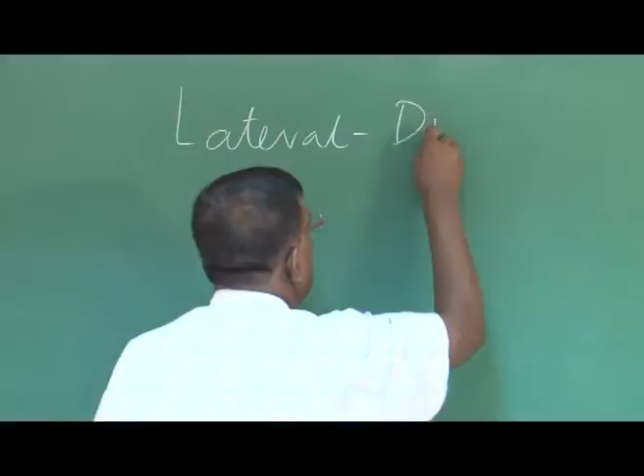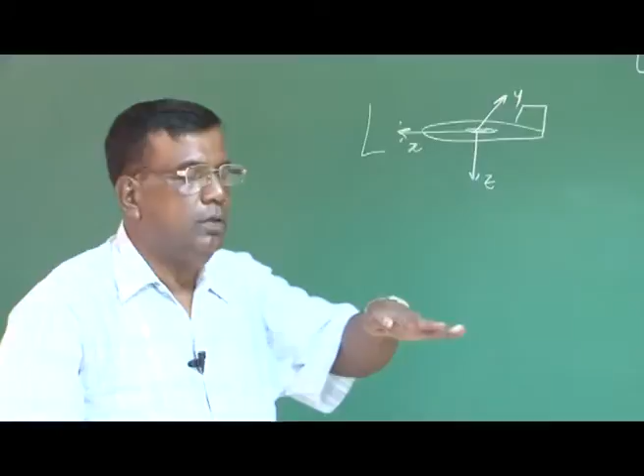Since we have assumed small angle of attack, small perturbation, we have assumed that longitudinal dynamics is decoupled from the lateral directional case. But now when we are talking about the lateral directional case, we understand lateral means - if this is the airplane, this is the x-axis, this is y, this is z. Lateral means we are talking about motion about the x-axis, roll or bank, and directional is motion about the z-axis, yaw, right?

But one thing you should understand is that lateral and directional case cannot be decoupled generally. You can understand, suppose this is the directional case, that is right wing is going back, what will happen? As right wing goes back, the left wing will come forward, so the relative air speed of the left wing will increase, hence the lift will increase, so it will bank also.

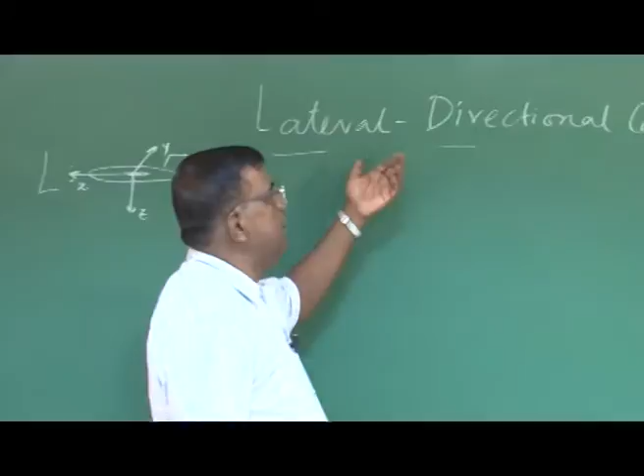So there is a coupling between directional and lateral case. The reverse will also be there - if there is a lateral disturbance, there will be a directional influence on the whole airplane dynamics. That is why we need to go with the lateral directional case together. We are not decoupling lateral and directional case. Although we will see some approximate studies where we assume lateral dynamics and directional dynamics separately, which also yield useful information, especially for designers, right?

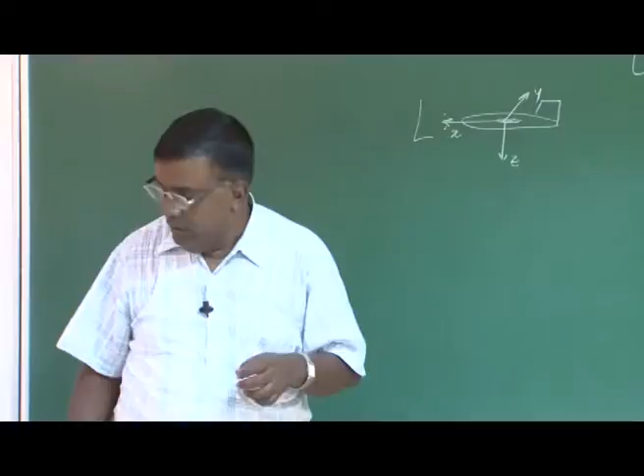Our approach was first to write the equations of motion, which we have already derived, then introduce perturbation, and then follow the similar steps as we have done for the longitudinal case. So we will take one equation and we will try to revisit, and you will see that you are very comfortable - nothing extra we are doing here as far as technique is concerned.

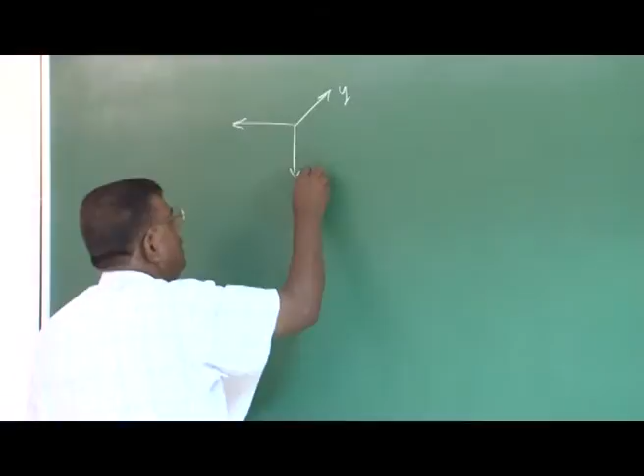If I take the equation along y, force equation along y direction, then rolling moment about x, yawing moment about z - these three, that is this motion along y, roll about x, and yaw about z, right?

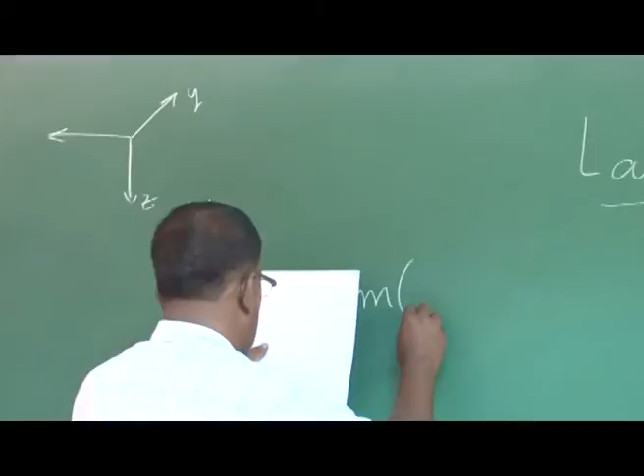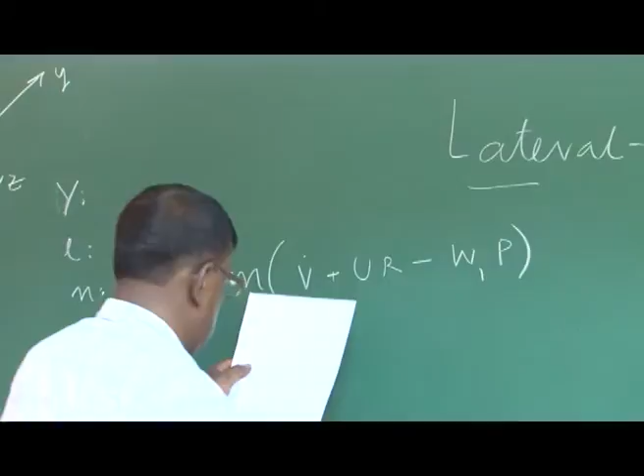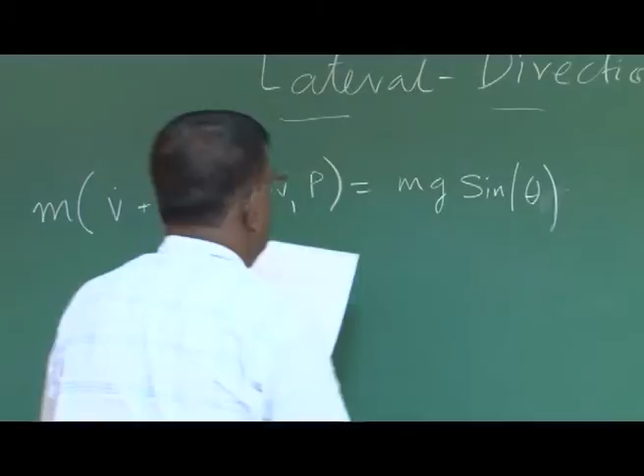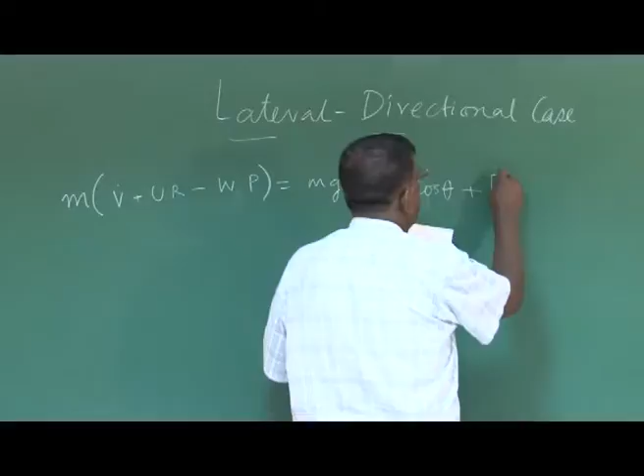So I will take the first y equation. If you recall, the equation was of the form m v dot plus u r minus w p is equal to mg sine phi cos theta plus F A y. This is the equation of motion along the y direction, right?

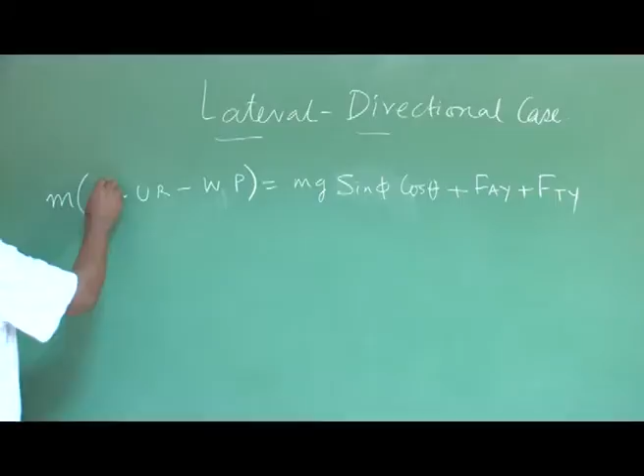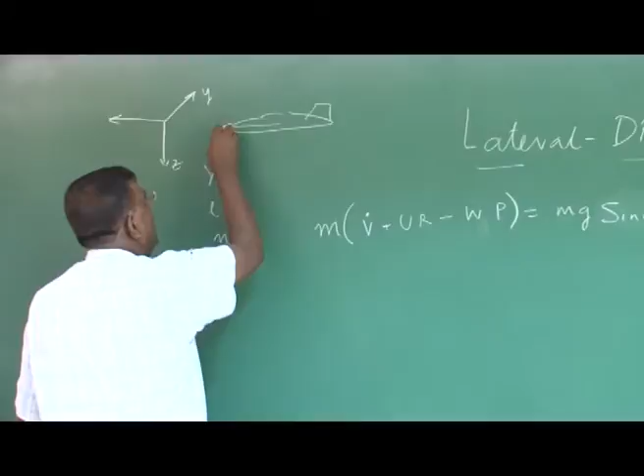What was v? v was the component of total velocity along the local y direction. If this is the airplane, this is x, this is y, this is z, and this is the total velocity vt or v star, whatever you write, then v is the component of this velocity resolved along the y direction of the body fixed axis system.

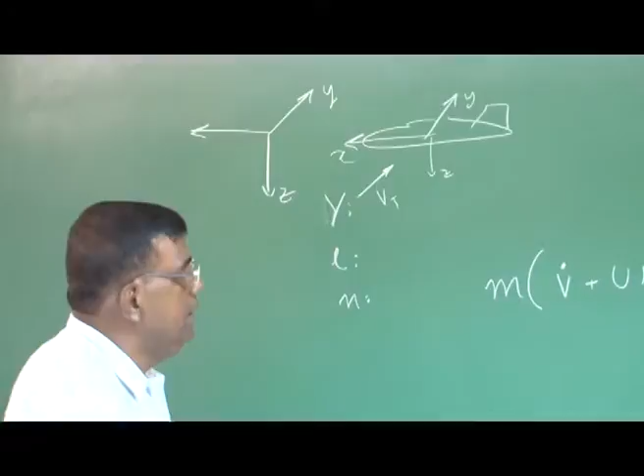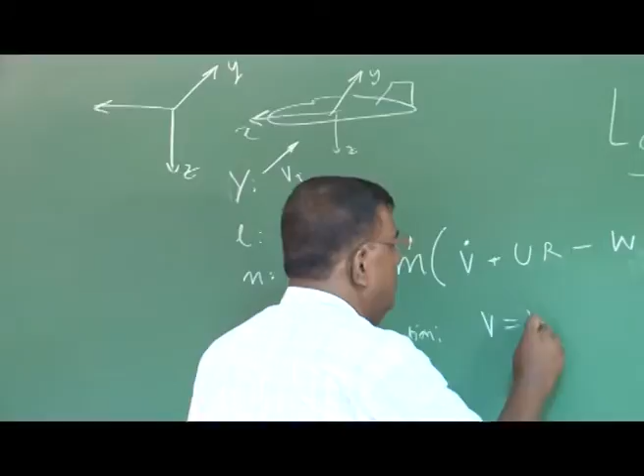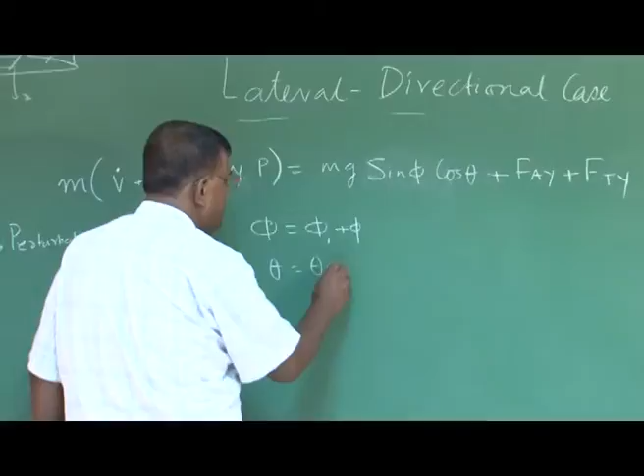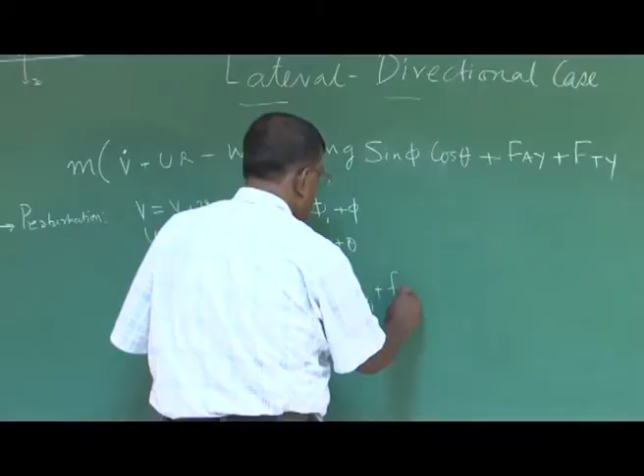Now, the next step was to introduce perturbation. So we introduce perturbation: v will be equal to V1 plus small v. All small quantities are perturbed quantities, but they are small perturbations. Then u equal to u1 plus small u, r equal to r1 plus small r, w equal to w1 plus small w, p equal to p1 plus small p. Similarly, phi equal to phi1 plus small phi, theta equal to theta1 plus small theta, then fay is equal to fay1 plus fay. I am neglecting the thrust component.

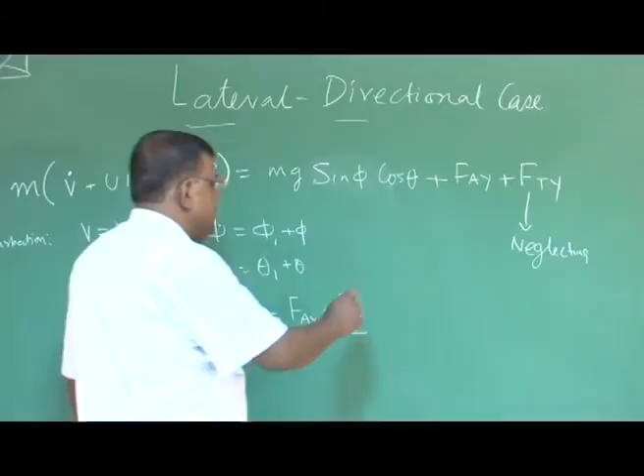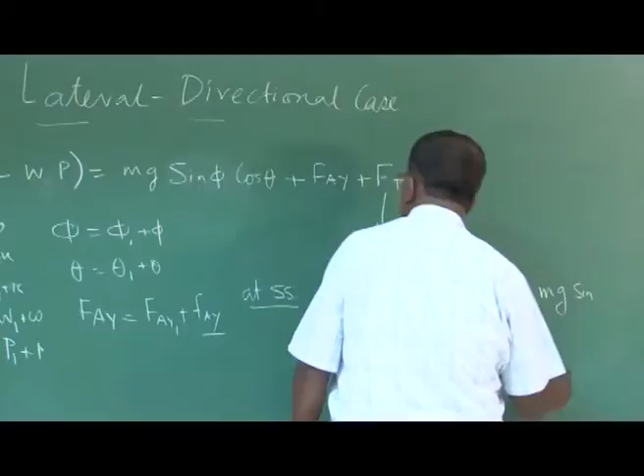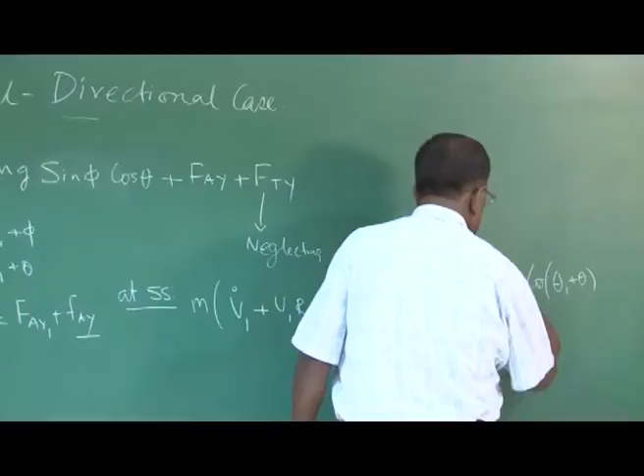We are neglecting it with the understanding that we know how to handle this if we know how to handle the fay term. What was fay? fay is the perturbed aerodynamic force along the y direction. And also we know at steady state what is true is m v1 dot plus u1 r1 minus w1 p1 is equal to mg sine of phi1 plus phi, cos of theta1 plus theta, plus fay1 plus fay.

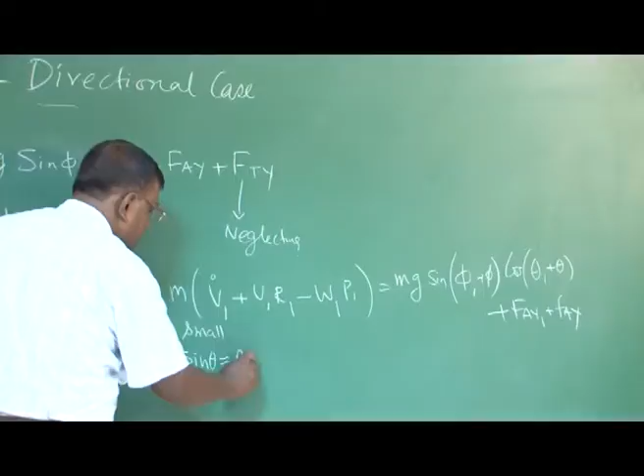We also know that we are assuming theta, phi, all are small, such that sine of theta is approximately theta, sine of phi approximately phi, and cos of theta goes to 1, cos of phi goes to 1. Nothing new we are doing.

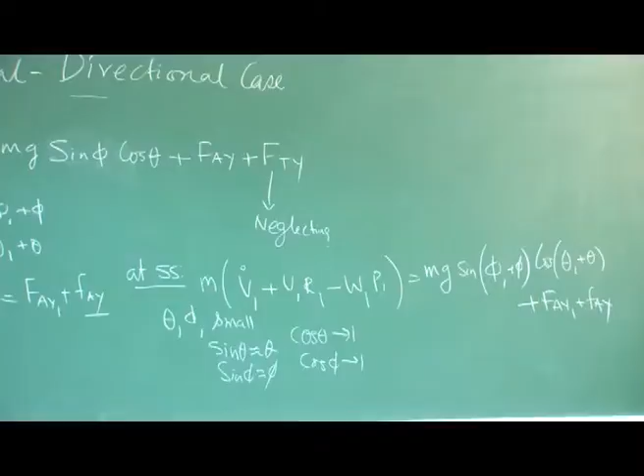So what we will do is expand this the way we did it for the longitudinal case. We will substitute these conditions and then simplify.

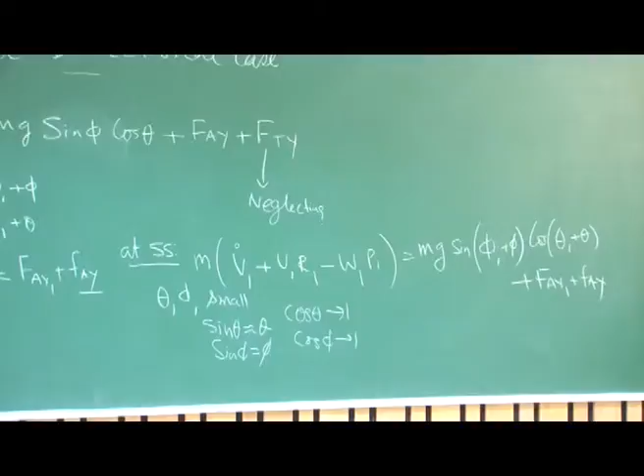Let me give you one more step to recall what we have done. For the first equation, you write m times v1 plus v dot, then plus u1 plus small u into r1 plus small r, minus w1 plus small w into p1 plus small p. This is equal to mg sine of phi1 plus small phi into cos of theta1 plus theta, plus fay1 plus fay. You could easily see this, which we have seen for the longitudinal case also.

Since at steady state this is true, this can be easily taken out from here: m v1 dot, then u1 r1, w1 p1. Similarly, expand sine of phi as sine(a+b), cos(a+b).

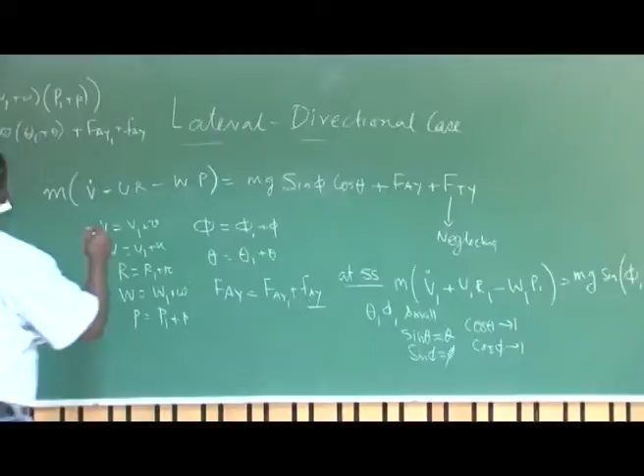Expand it, put in this approximation, and when you do all this, you will get an equation. So as we have done for the longitudinal case, you expand it, take out the terms that are automatically satisfied, use this approximation, and also note — this is nothing new I am doing — at steady state...

V1 we have taken as 0, cruise, phi1 equal to 0, P1 equal to Q1 equal to R1 equal to psi1 dot equal to theta1 dot equal to phi1 dot, all are equal to 0. We are talking about cruise, steady, level, unaccelerated flight.

So this also goes to 0, and now when you put all this in here, you get very simplified equations of this form. When I do all those substitutions, I get the perturbed equation of motion in the y direction as: m v dot plus u1 r minus w1 p is equal to mg phi cos theta1 plus fay.

What is theta1? It is the attitude of the airplane during cruise, so that need not be 0. That's why you have kept theta1 so far.

Also note here, the moment I put another condition that we are using stability axis — recall what is stability axis. If this is the airplane, and this is the normal body x, y, z, and let's say this is the relative airspeed, and this is the angle of attack, then xs means the x-axis is aligned with the velocity vector in the vertical plane, and this becomes zs. The advantage is, if this is xs and this is zs, then naturally w1 is 0.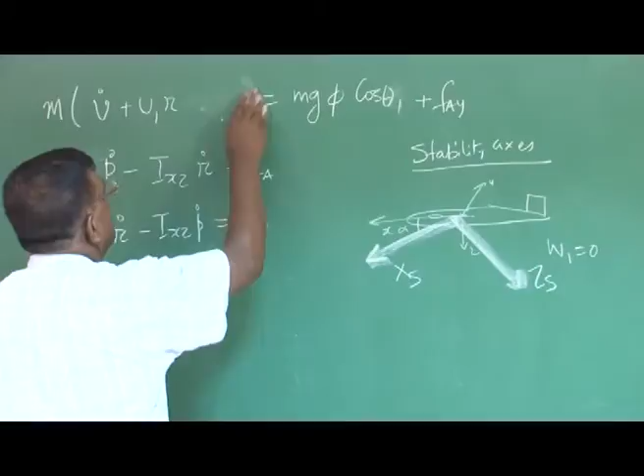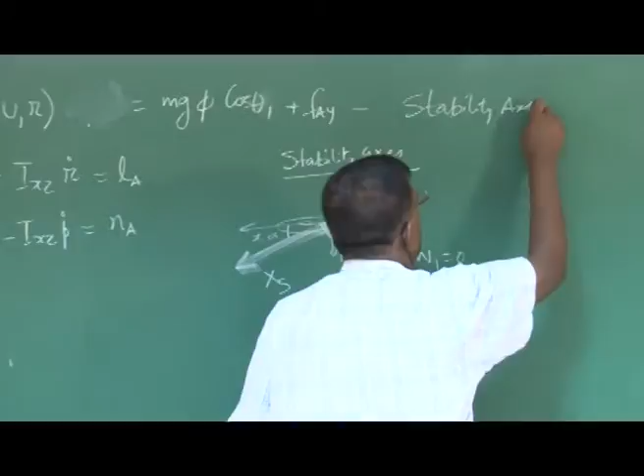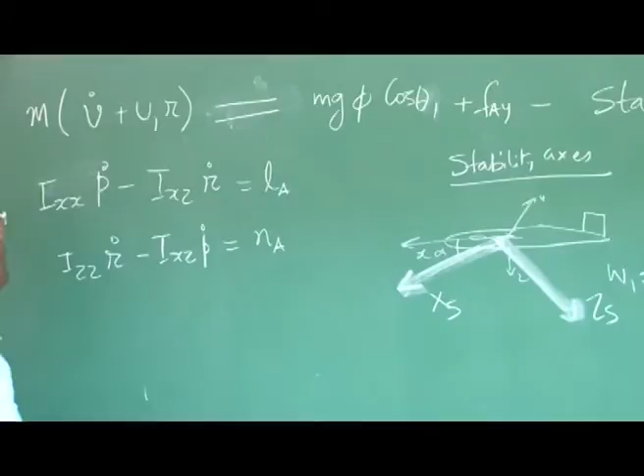So we further simplify this equation and remove this term, so we get this equal to this in the stability axis system. So now the equation becomes much simpler. I write this equal to this, and we should be careful that we are now using the stability axis system.

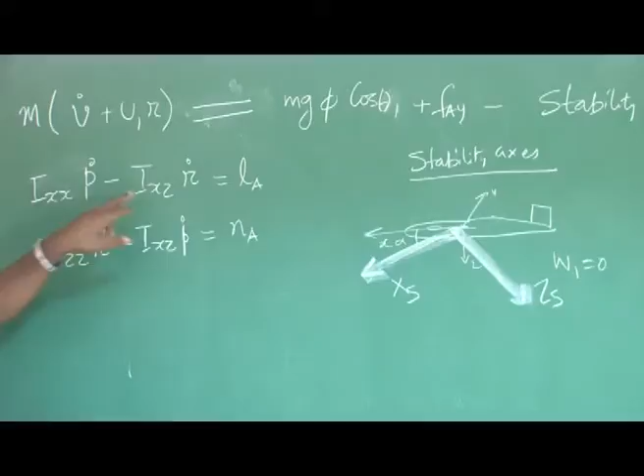The moment I use the stability axis system, please understand — earlier this Ixx, Ixz were about the x, y, z axis. Now you are solving everything in the stability axis system, so Ixx, Ixz, Izz, Ixz — they should also be in the stability axis system.

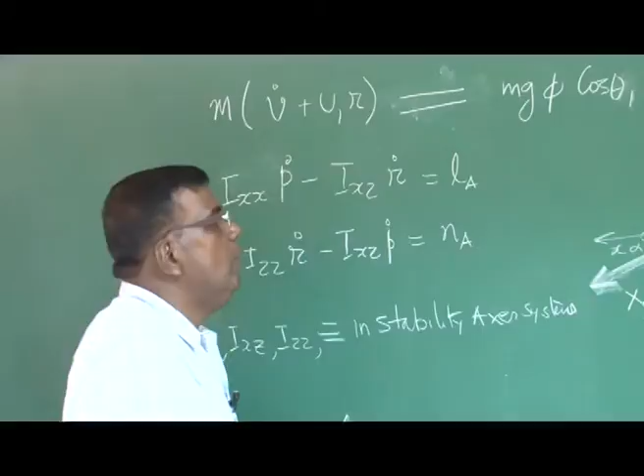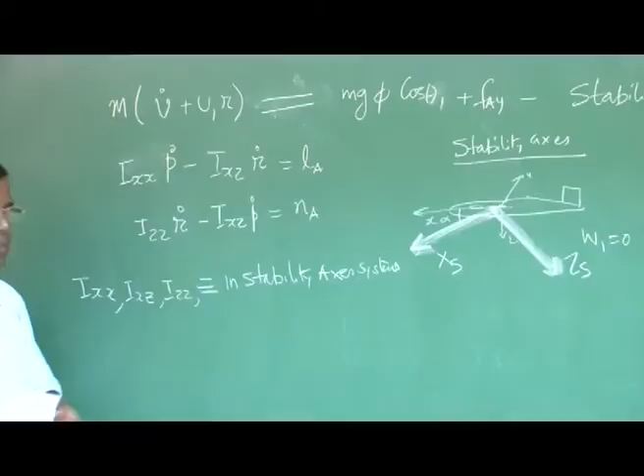What does this mean mathematically? You know the moments of inertia about the x, y, z axis. This is one axis transformation with alpha, so you have to calculate the new values of moment of inertia about the stability axis system, and for that you can directly use a transformation, which I will just give for completion.

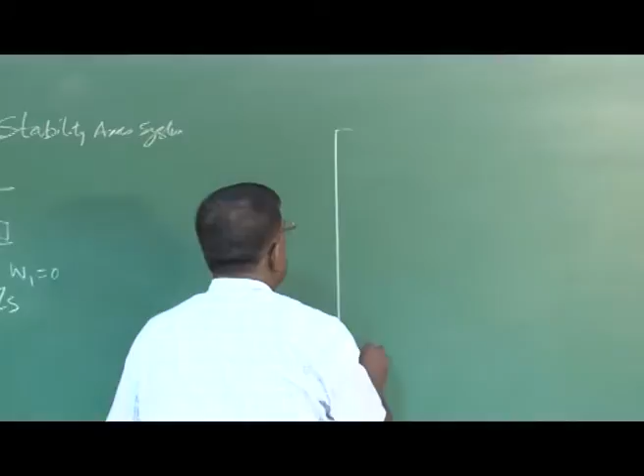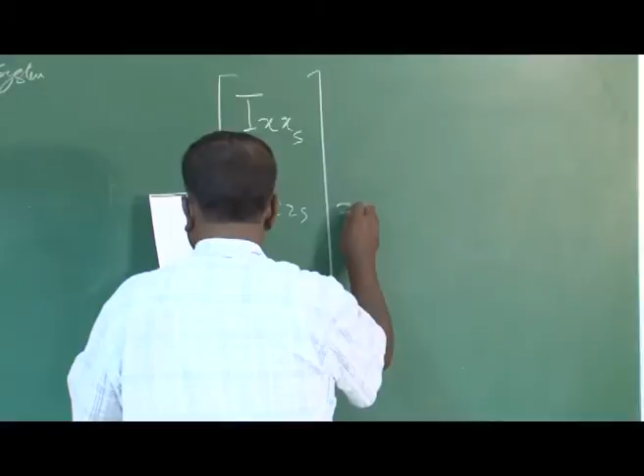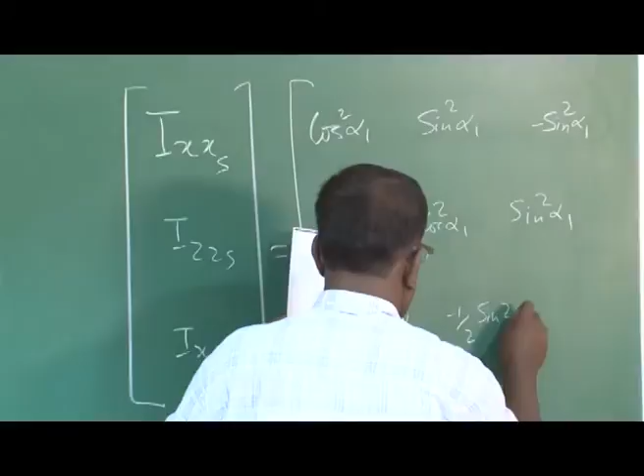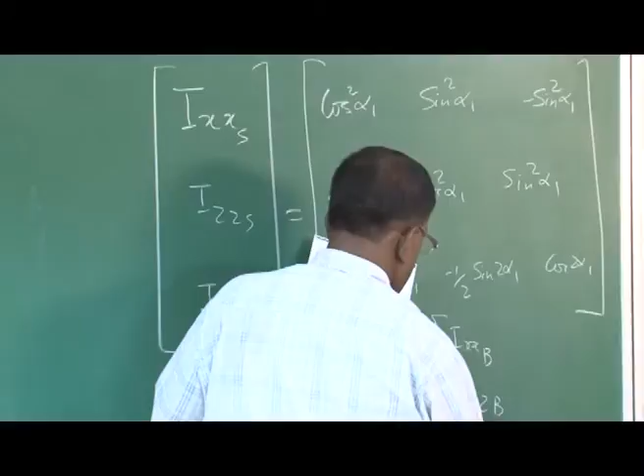This is Ixx stability axis, Izz stability axis, Ixz stability axis, equal to: cos square alpha1, sine square alpha1, minus sine square alpha1; then sine square alpha1, cos square alpha1, sine square alpha1; and half sine 2 alpha1, minus half sine 2 alpha1, cos 2 alpha1 — into Ixx body axis, Izz body axis, Ixz body axis. You can check this in any literature.

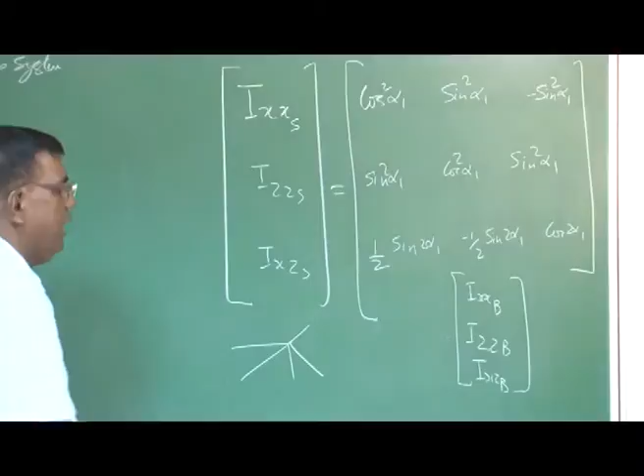How do I do body axis transformation? That is, if this is x, y, and z, how can the values measured with respect to x be transformed about another axis which is rotated by angle alpha? You can please cross check this.

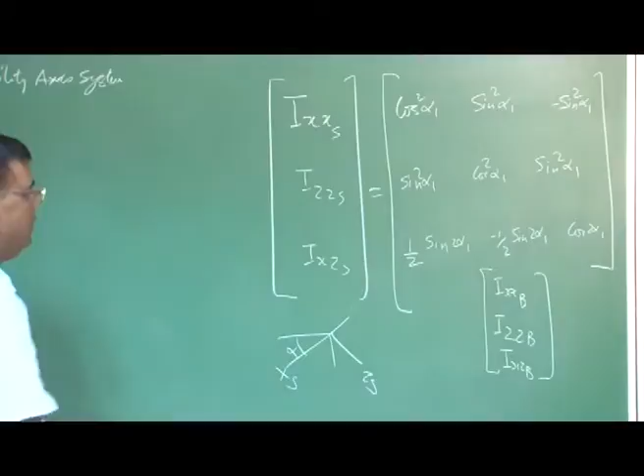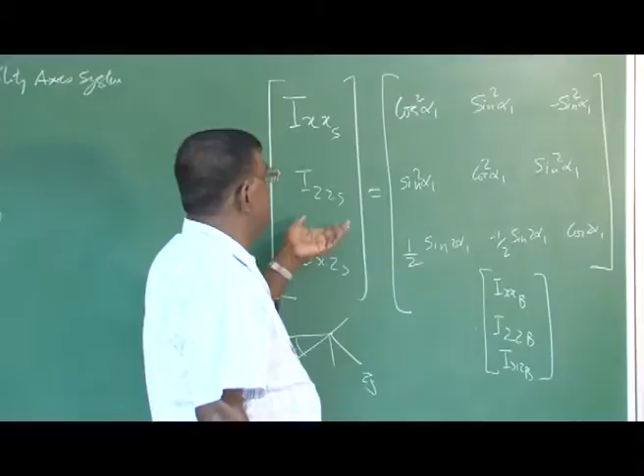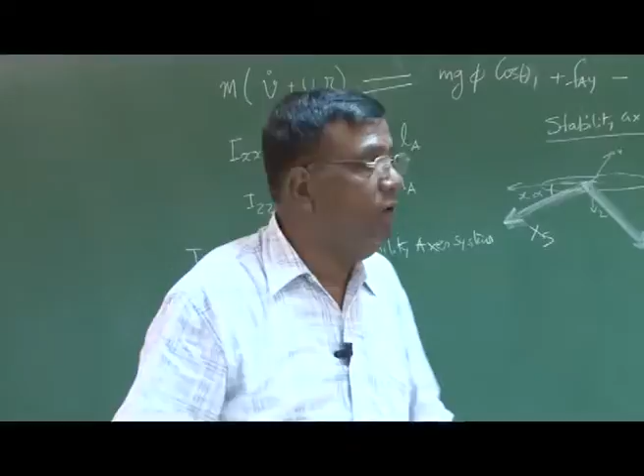The important part is to understand, when using the stability axis system, how much the moment of inertia changes, since it's an angular motion in lateral directional dynamics. Two motions - roll and yaw - are angular motion. How are they getting affected? We need some numbers to get a feel for this.

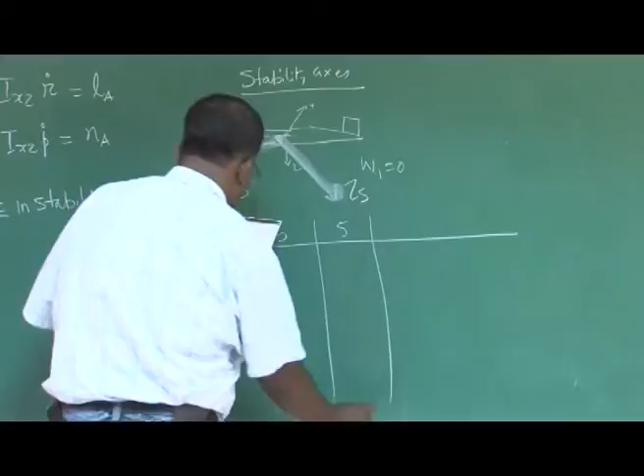For completion, I am giving you an influence matrix where you can easily understand how much change happens. I take two cases: alpha 0 degree and 5 degree. If Ixxb is 10,000 in some unit, then at alpha 0 it is 10,000, and for 5 degree it becomes 9751.

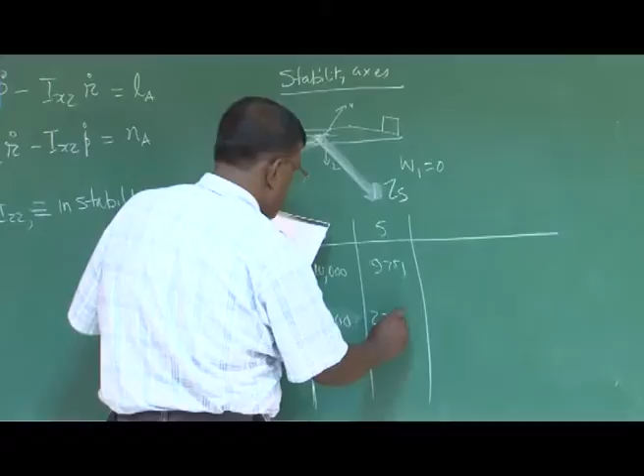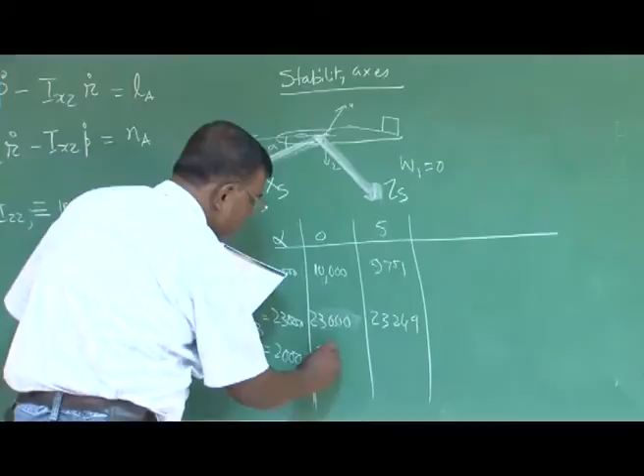Similarly, IZZB, if it is 23,000 at 0 degree, for 5 degree it becomes 23,249. Similarly, IXZB, if it is 2,000, it remains 2,000 at alpha 0, but at 5 degree it becomes 841.

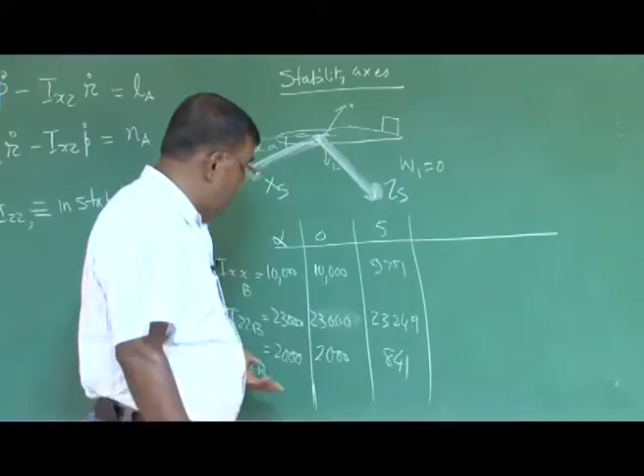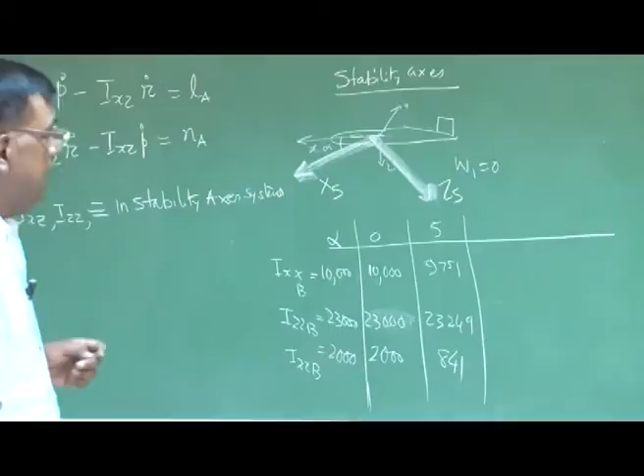So it is not really to be ignored, because a lot of cross coupling happens through IXZB, and these values show a lot of influence. As a designer we need to have this feel for how much percentage these values will change, before you comment on the final result.

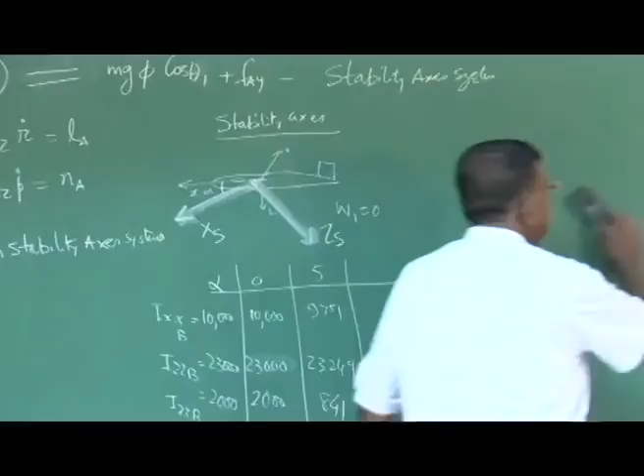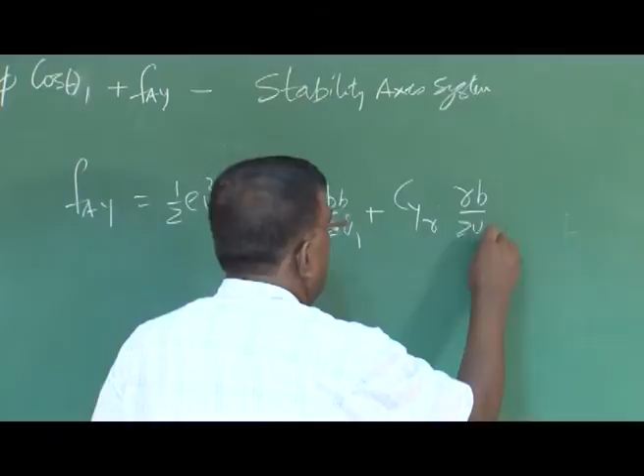If we have understood up to this point, let me erase this. Now, remember FA, Y, LA and NA are to be expanded in terms of motion variable and control variable. We have already seen that FAY can easily be written as half rho V square S into CYP into PB by 2U1.

Plus CYR into RB by 2U1, CY beta into beta, CY delta A into delta A, plus CY delta R into delta R. We have seen how to write this. Now if I substitute this here and divide by M, I can write this equation in dimensional derivative form, as we did for the longitudinal case: V dot plus U1 into R equals G, M gets cancelled, G phi cos theta 1, plus YP into P plus YR into R plus Y beta into beta plus Y delta A into delta A plus Y delta R into delta R.

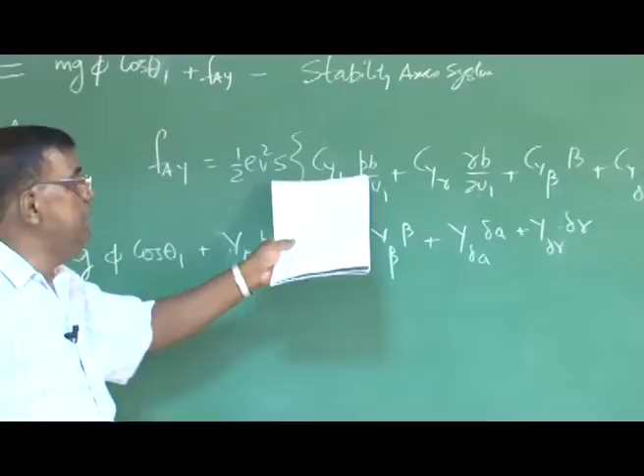Are you clear what we have done? We know this expansion, because FAY is half rho V square S into CY. And CY is a function of P, R, beta, delta A, delta R. Assuming aerodynamics to be linear, we have expanded this as CYP into PB by 2U1, where B by 2U1 is multiplied to non-dimensionalize P, all the rates.

This is the form the equations take, and if you want to see what the value of Y beta will be, instead of Fy, write this expression divided by M, so beta is here. That will be half rho V square S Cy beta divided by M. We evaluate this at steady state, so Y beta will be written as dynamic pressure Q1, S Cy beta by M.

Similarly, if you want to check the expression for Yp, it is very simple. We are putting this expression here. P is here, this is half rho V square S Cyp into B by 2U1 divided by M. So Yp will be Q1 S B Cyp by 2M U1. Check yourself: if I take this term, this is half rho U1 square, evaluating at steady state, into Cyp into Pb by 2U1, divided by M since I am writing in terms of V dot. So what happens here is I can write this as Yp into P.

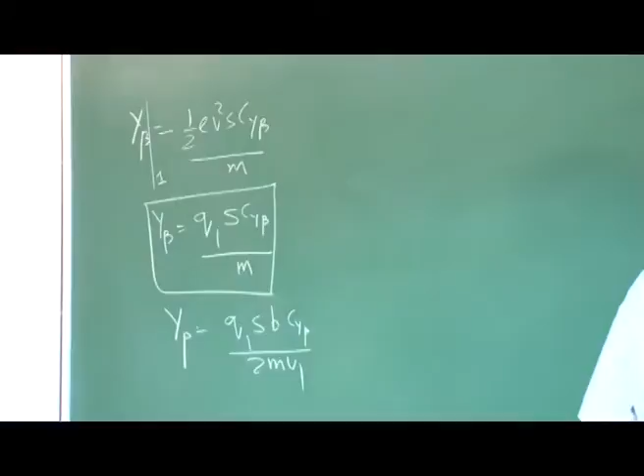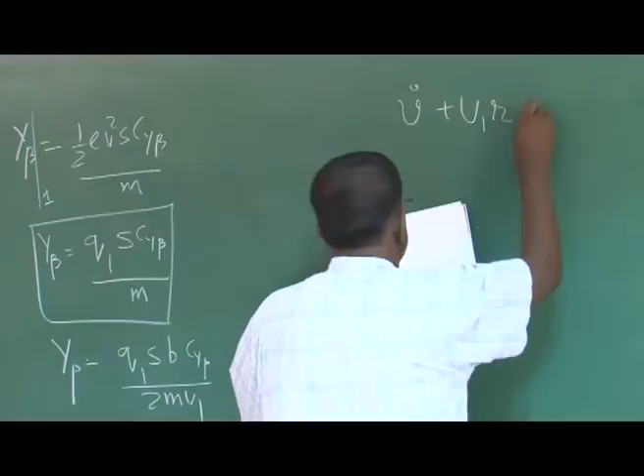Similarly, you can check other dimensional derivatives. And if you do the similar exercise for lateral and directional case, you will get an equation of the form. Let me write this complete: v dot plus u1 r is equal to g phi cos theta 1 plus yp into p plus y r into r plus y beta into beta plus y delta a into delta a plus y delta r into delta r.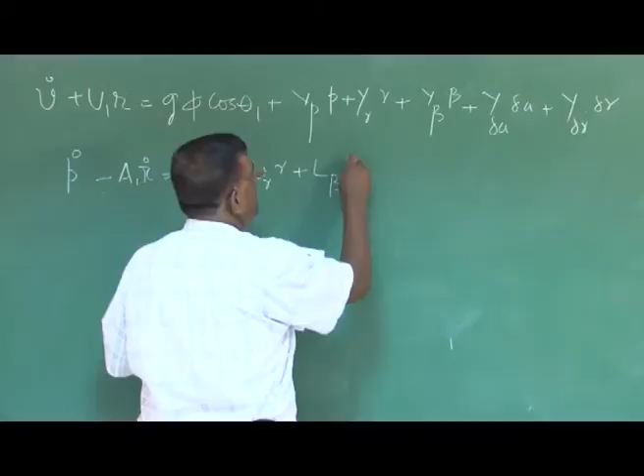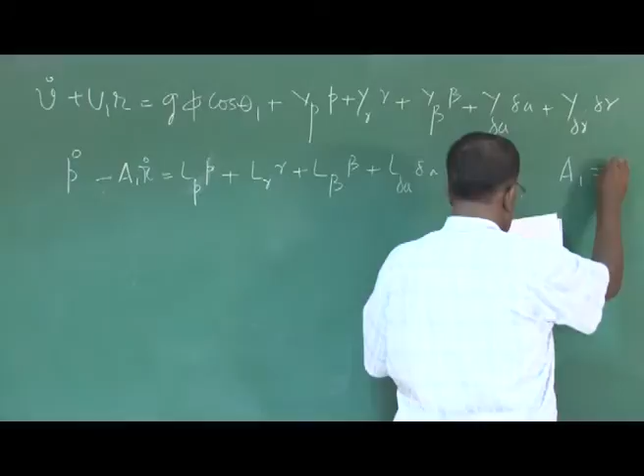Similarly, from the second equation, you will get p dot minus a1 r dot equal to LP into P, same sequence, LR into R plus L beta into beta plus L delta A into delta A plus L delta R into delta R. And A1 is nothing but IXZ by IXX. Let me write B1 also here as IXZ by IZZ.

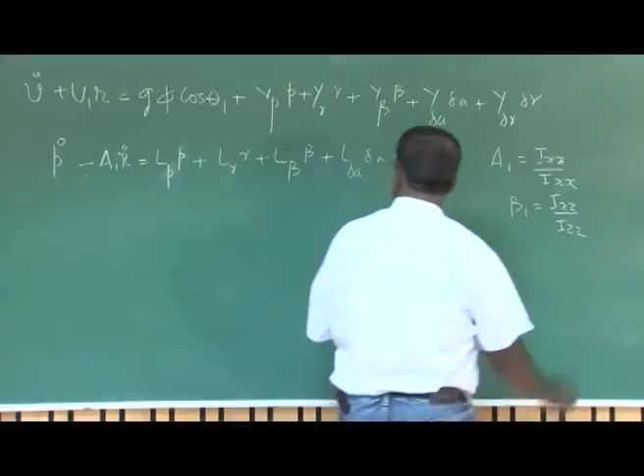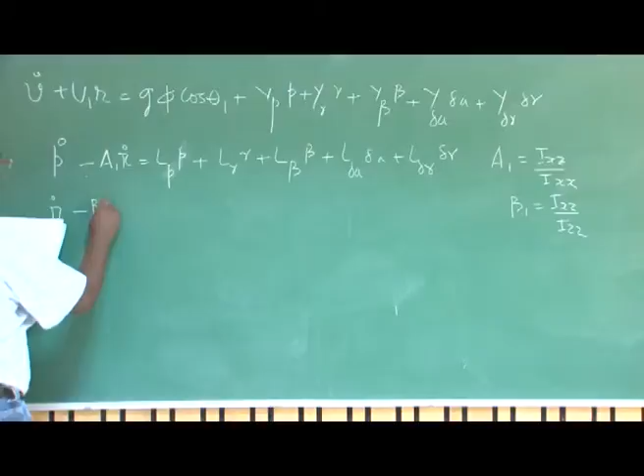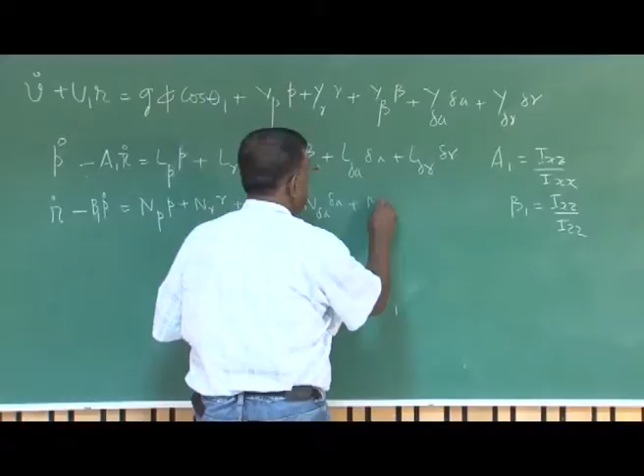And the third equation you will get R dot minus B1 P dot is equal to NP into P plus NR into R plus N beta into beta plus N delta A into delta A plus N delta R into delta R. You will get these three equations, and this will represent

short period equation of motion for the lateral dynamic case. Okay? And you have seen that we have made the aerodynamic model fairly simple. We have not talked about beta dot. There could be delta R dot also, but we are taking a simple case. Okay? I am sure once you know how to do this, you will be able to do this second and third equations.

What is important for you to know are the expressions for LP, LR, L beta, so that you can cross check yourself by doing it. So let me write those. LP is

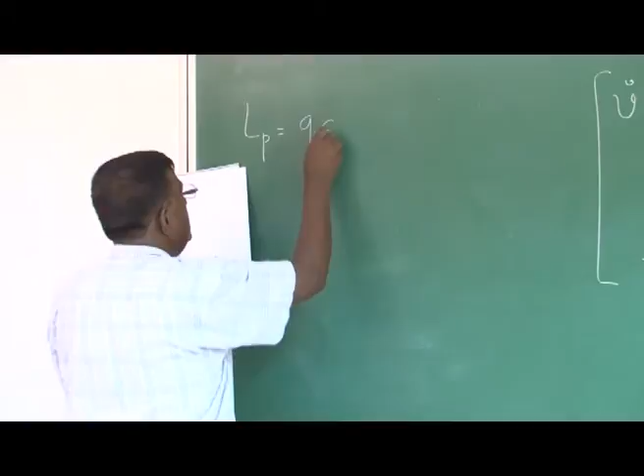Q1 SB square CLP by 2 IXX U1, that is LP. LR is Q1 SB square CLR by 2 IXX U1.

Then your L delta A will be Q1, let me write this as SB CL delta A by IXX. And then L delta R will be Q1 SB CL delta R by IXX.

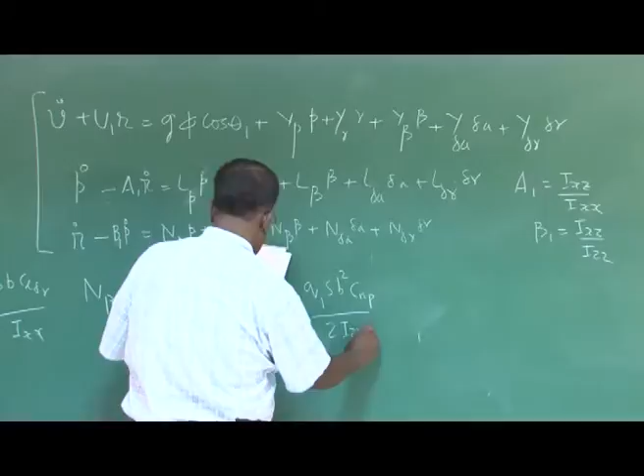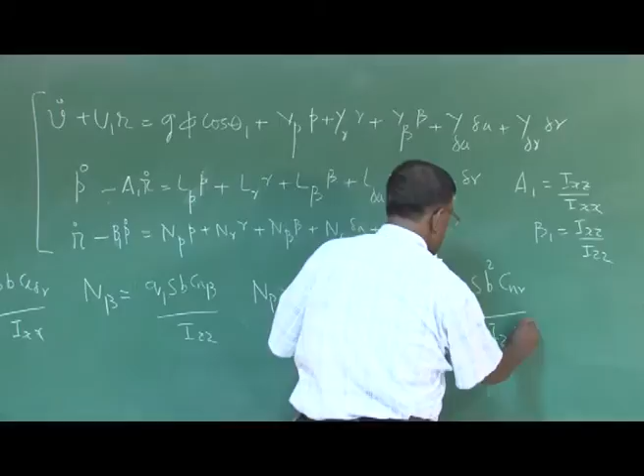Then N beta will be equal to Q1 SB, very simple, you could see that, by IZZ. Then NP will be Q1 SB square CNP by 2 IZZ U1. Then NR will be Q1 SB square CNR by 2 IZZ U1. You can find out N delta A and so on.

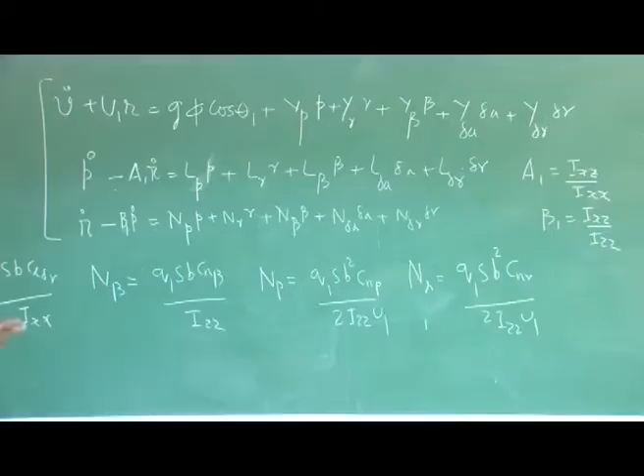What I will do is give you a page with this whole expression. You need not remember this, you need not remember these equations. I'm again and again telling you these are standard ones you have to do to make clear-cut understanding of what these things are.

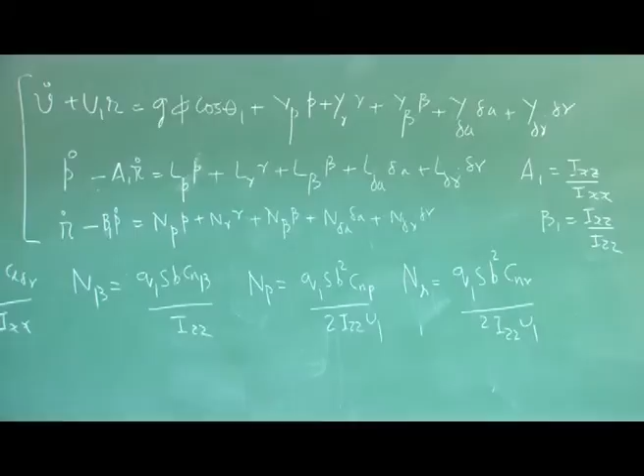Okay? So now, once you have this, what is the next step? Next step is, this is in time domain. We understand if I solve this in time domain, I should be able to track the values of small v, r, p to comment on the dynamic stability of the machine. But we will be following the Laplace transform approach. We will work in the frequency domain in the S plane, so that these differential equations become linear algebraic equations, right?

So that will be our next step, and then we will find the matrix, then we will find the characteristic roots in a similar way as we have done for the longitudinal case, right? So I'd like to stop here so that you at least digest this. Please remember one thing, no need to remember, no need to cram anything here.

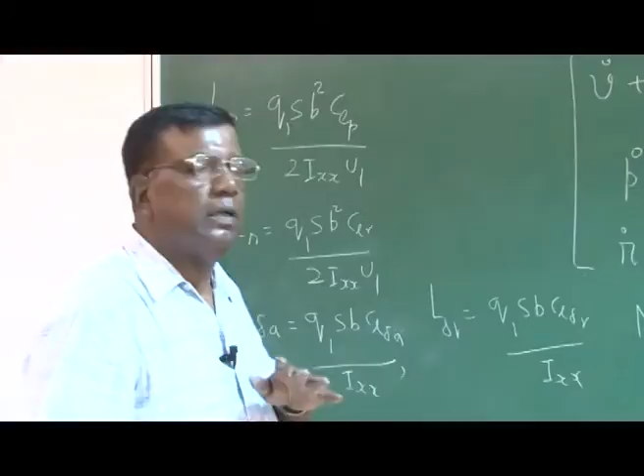Okay? Only you understand, if somebody tells you n beta, what should come to your mind? Cn beta. What is Cn beta? Cn beta is directional stability. Cn beta should be greater than 0. Np, you should think what is Cnp. Nr, you should think of Cnr. All these derivatives I have explained to the sign and etc. in the last lecture.

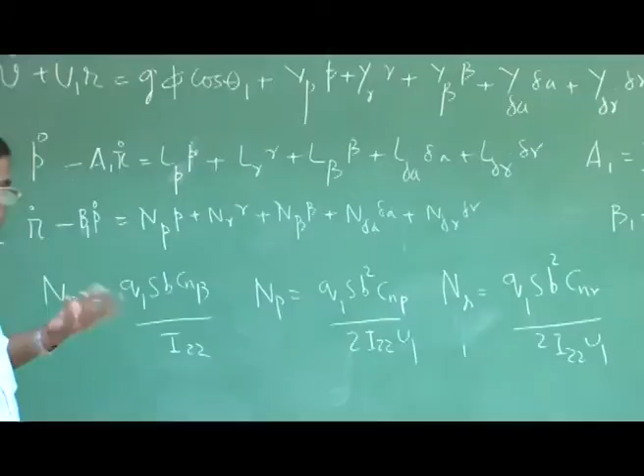That is more important. As a designer, you should have that in your mind, so that you know if you want to increase n beta, how to increase Cn beta, whether I increase the vertical tail, whether I take the CG forward, or I put something with the wing, or make the fuselage a little differently. So that is what is required from this expression. Okay? Thank you very much.